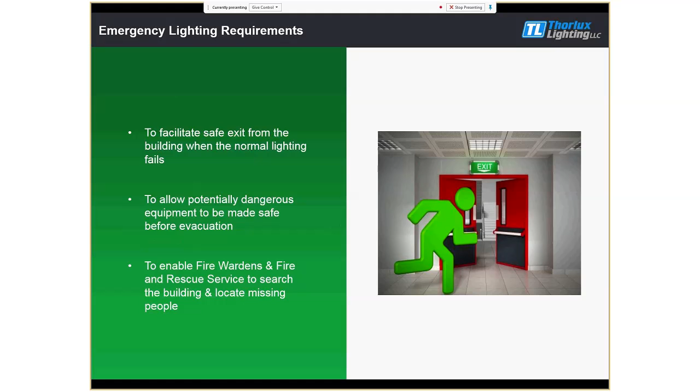So, emergency lighting, what is the point of emergency lighting? Well, of course, it's to facilitate safe exit, so people can get out of the building quickly and safely in the event of emergency or a mains power failure, to allow potentially dangerous equipment, particularly in industrial environments, to be made safe before those people evacuate. And in many cases as well, it's to allow fire wardens and the fire teams to search the building and check for any missing people. So emergency lighting really does have quite an important role. The UAE Code of Practice is quite clear.

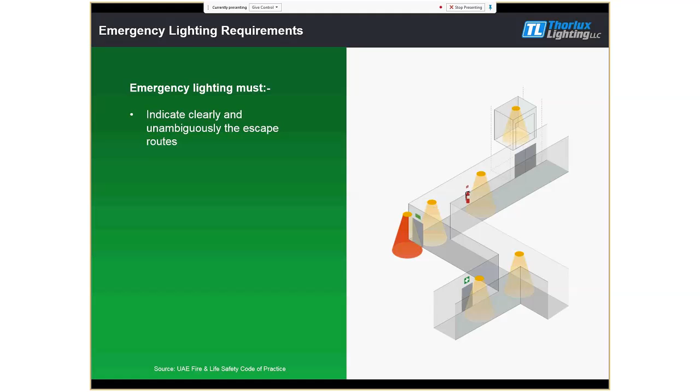It says that you must indicate clearly and unambiguously the escape routes, provide illumination along such routes to allow safe movement towards and through exits, to ensure that fire alarm call points and firefighting equipment are sufficiently illuminated so people can readily locate them as they exit the building, and permit operations concerned with safety measures inside the building.

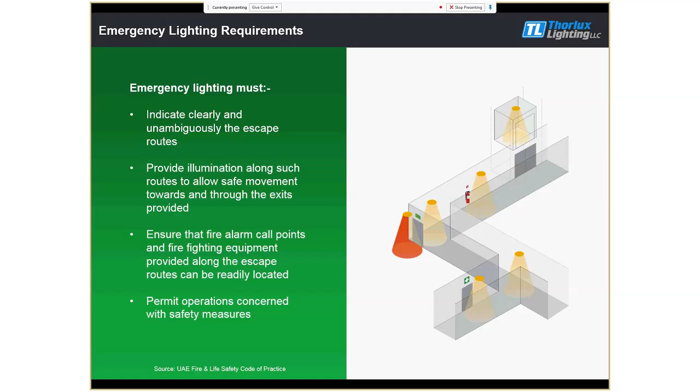So the UAE code is quite clear there in terms of what you've got to achieve, but how do you actually achieve that? Well, if we start to break emergency lighting down, then essentially we have two forms of emergency lighting. We have standby lighting, we have escape lighting. Now, standby lighting isn't covered in the UAE code, but standby lighting is, of course, where you have a UPS supply or a generator supply that's supplying 100% of the power to the luminaires, so all of the activities can carry on if mains fails to the building.

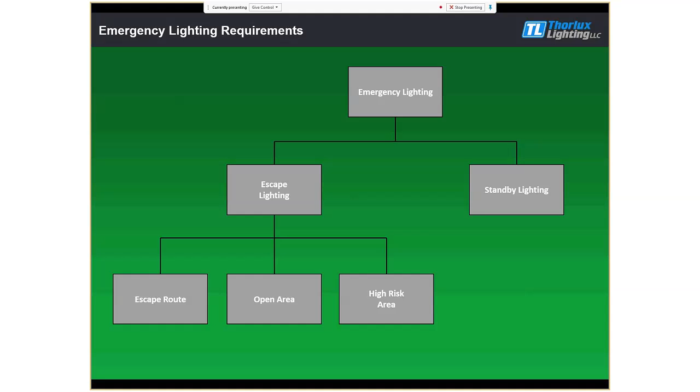When we then start to look at escape lighting, then we can start to break it down a little bit further. So we've got escape route, open areas, and high-risk areas. And this is where we start to put a little bit more meat on the bones in terms of what the UAE code requires. So along escape routes and corridors, anywhere where people are going to be joining the flow to get out of a building, we've got to achieve 10.8 lux average and 1.1 lux minimum. So, of course, this is quite a lot higher than what we're used to in the UK. And, of course, a lot of this is driven through the American standards.

There's also a uniformity requirement, 40:1, so maximum to minimum. So we must make sure that the contrast between the high and the low spots isn't too great, so we have visual continuity as people escape through the area. For open area lighting, this is usually deemed an area that is over 60 square meters or has an associated risk with it. And again, the light levels are the same, 10.8 lux average and 1.1 lux minimum, and the same uniformity requirement. And it's usually reasonable to exclude a half a metre border around the outside, just like we would with the UK standards as well.

As we go into high-risk areas, this really does require some extra thought and attention. In most cases, particularly in industrial areas, and of course out in the UAE there is a lot of industry, a lot of very dangerous processes, these need to be made safe before people evacuate the area. And then, as people work their way through these spaces, it's got to be safe for them to do so. So the illumination levels step up a level. We're now looking at 10.8 lux minimum rather than an average. So again, we're starting to see quite high light levels. So in most cases, you will probably need to look at a central battery system of some sort to be able to provide those kind of light levels. I'll mention that in a second.

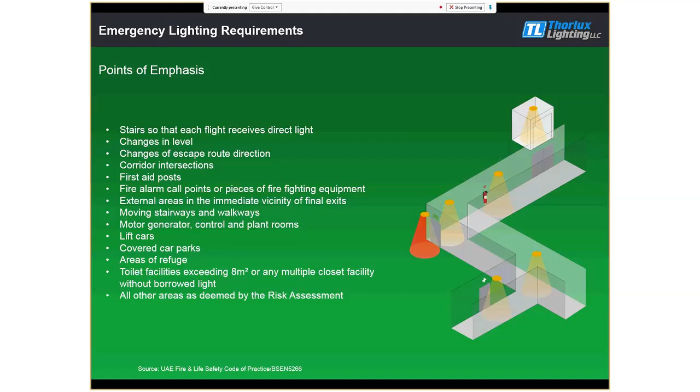So as we're planning our lighting designs, we must make sure that all of these areas are catered for in the design process. The UAE code, again, is quite clear that the emergency lighting must be provided for 3 hours. Again, nothing new, very similar to what we are familiar with. However, what is different is that after 1.5 hours, you have to hit at least 60% of your designed light levels. So if you're designing to 10.8 lux average, then you can go down to 6.5, and obviously 1.1 lux minimum would become 0.65 lux.

I can't imagine anyone actually going around with their light meter after 1.5 hours and measuring these light levels. But nonetheless, that's in the code there. I think it's not really needed these days, because most manufacturers' lumen outputs typically take into account battery degradation, lamp degradation, etc. So the lumen outputs that you designed with are at the end of a 3-hour duration, at the end of life of the battery, etc. So you should never really get into that situation anyway. But just be aware of it, because you might come across it.

Hotel rooms and suites also need to be covered. So again, in the UK, we don't need to worry about this. But out there, it's quite clear that you need emergency lighting in those areas. And it also pays special attention to buildings where many people may be in attendance. So I think this is an indicator that extra thought needs to be given to these sorts of places where lots of people can congregate. So in terms of emergency lighting design, it needs to be very robust and rigorous. Again, we're all very familiar with this.

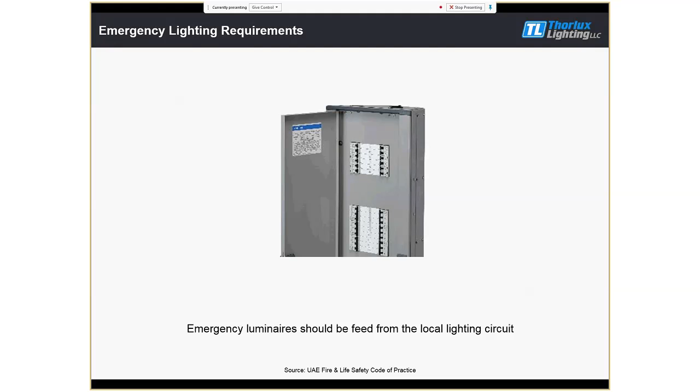Emergency lighting should be fed from the local lighting circuit. Of course, it goes without saying. And again, the UAE code is very clear on that. And this is where we start to get a little bit strange. So when it comes down to testing of emergency luminaires, it makes these following statements. Emergency luminaires shall be automatically monitored and tested through a dedicated control system. So where we're putting emergency lighting into buildings, it must be auto-test.

It must be self-test. But talking to a lot of people out there, if you've got a fairly small building, then they're clearly not going to invest in a self-test system, and it doesn't happen in quite a lot of cases. But nonetheless, it's there, so just be aware of that. I think what it's trying to drive is that certainly in large buildings, this is desirable. And where you've got an automatic test system, it needs to be interfaced with the BMS. Now again, it says it should be interfaced, but it doesn't say what should be interfaced, how much should be interfaced, or what the interface protocol should be. It just says it should be interfaced. So that's a little bit open to interpretation.

But just going back a stage, talking to some of the consultancy practices out there, every single emergency lighting design has to be approved by civil defence. So in a lot of cases, I believe what happens is that if you've got a small building, and it doesn't make sense to put a self-test facility in, then you can have that dialogue with civil defence, and you can say, look, my building's only got 3 rooms, I've only got 10 emergency lights, I'm not going to be putting a self-test system in, and civil defence will make a judgment and instruct otherwise.

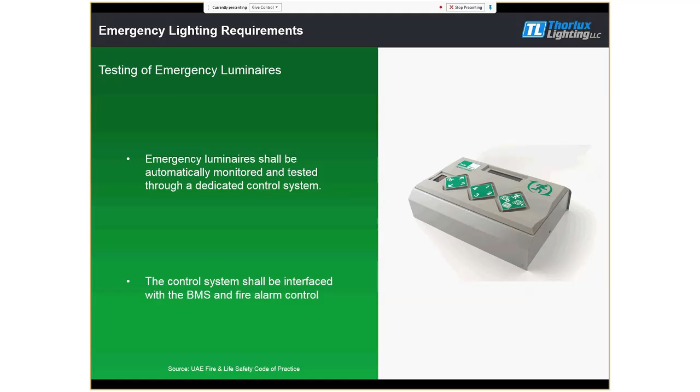And I think probably this is why they don't put too much detail in here, because civil defence have to approve every project, so you will naturally get into dialogue with them, and they will steer you in terms of what they expect. So clearly, if you've got a very big building, they're looking for a pretty robust and automated system, particularly in terms of communication. Whereas the smaller you go, they may not be so bothered about that. But just be aware of that in there.

Exit signage, of course, is needed to direct people out of the buildings. Not really anything different to what we're familiar with. It does say to ensure that escape routes are apparent from any location in the building. So if it's not immediately obvious where you exit, then you need a series of exit signs to be able to direct you out. They should be conspicuous, and we must consider smoke accumulation as well.

So the mounting height of exit signs does come under scrutiny. Mounting them too high can cause some problems, so we do need to give that consideration. Where we are using exit signs, it's quite happy to use either externally lit or internally lit. Just a reminder, there is a limit on viewing distances.

So if you're externally lighting the sign, then you can only realistically have a viewing distance of up to 15 meters if you've got a typical 150 millimeter high sign. Internally lit, of course, you go up to 200 times the sign height, so you can double that up to 30 meters. So just give that some consideration as you're working through the scheme. But again, not really different to the UK.

Clear and unambiguous. I love this picture. I've got a few like this, but I think that's the best one. Which way do you go? So, of course, it goes without saying, with any exit signage, it really must be very clear in terms of which way you exit out of the building.

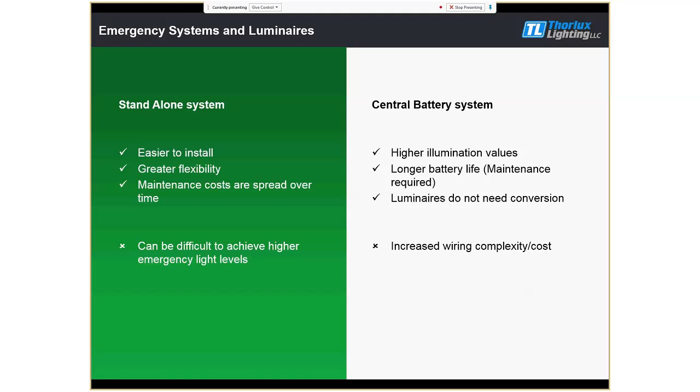In a lot of cases, luminaires don't need conversion, so you can just hook those straight up. But increased complexity of wiring and cost, and there's a particular facility of the UAE code, which I'll mention in a second as to why that's prominent. The central battery cabinet needs daily inspection to make sure that it's in a ready state to provide emergency lighting. If one unit fails in a room with a standalone system, that's probably not going to be a big problem, but if your whole cabinet goes down, then you're in a bit of trouble. So it needs daily inspection.

And you can also have a problem with capacity. If you haven't got headroom in the system, then as the building changes and you want to maybe put more emergency luminaires into the building, you might have a problem in doing that. Whereas with a standalone system, of course, you don't have that. So there are benefits and pitfalls to each, but the UAE code is quite happy to accept both systems. It doesn't particularly steer you down one route.

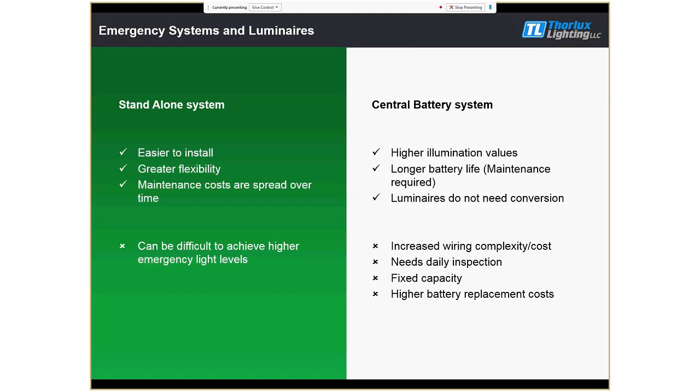Oh, I missed one there. Higher battery replacement costs, yeah. So of course, once those batteries do come to the end of life, they're quite expensive, and it all comes in one hit to the end user, which may or may not be an issue.

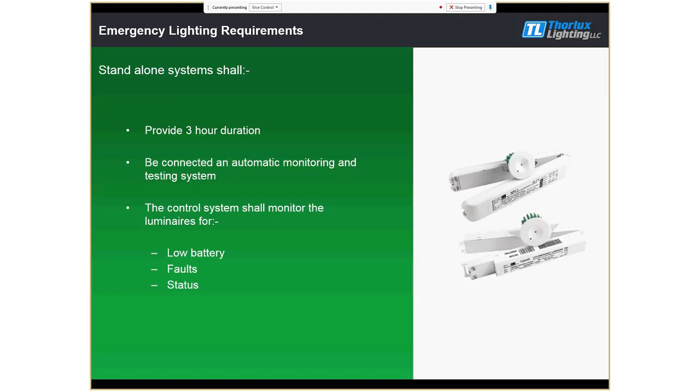So when we start talking about standalone systems, as I've said, they must provide 3-hour duration, they must be automatically monitored, and it says that the monitoring shall be at least for low battery, faults and status. That's all it says. So could be a little bit more detail there, couldn't it? But most systems will usually provide that as a basic.

Central battery systems again provide 3-hour duration. Again, they must be connected to an automatic monitoring and testing system. But it's this that can add to the cost. So it says that a cross-zoning arrangement must be used in the building.

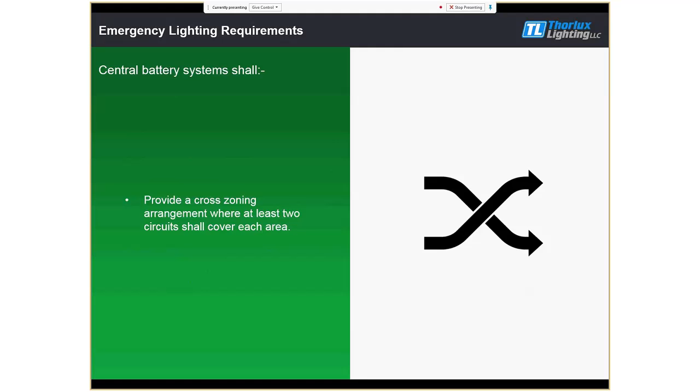So any area must be fed from at least 2 emergency luminaires and from 2 different circuits. So if one circuit is lost, you still have emergency provision in the building. So this is where the extra cost can arise in providing this cross-zoning arrangement, particularly when you're looking at armoured cabling from the central battery, and that's where a lot of cost can come into it.

Product suitability, aesthetics I think really come into play with this. It's amazing how many of those fittings are used out there. So you've got these wonderful buildings, you've got marble floors and marble pillars, and the architecture is fantastic. You look up at the ceiling and they're just littered with those things. And it's just such a crying shame, it really is.

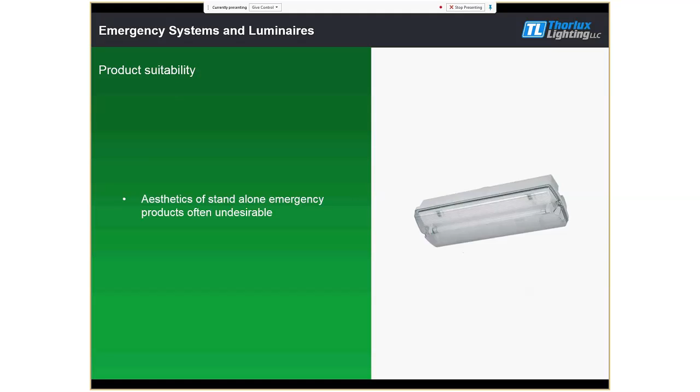So I think we need to think a bit more about product aesthetics, and I think we are moving to a time now where LED technology is becoming quite discreet. So LED technology is allowing us to produce small light fittings, more powerful light fittings, and of course has the long life and lower maintenance benefits to go with it. So we can use lenses to optimize the control. So particularly where we're looking at corridor applications, we can distribute the light down the corridor to use less luminaires.

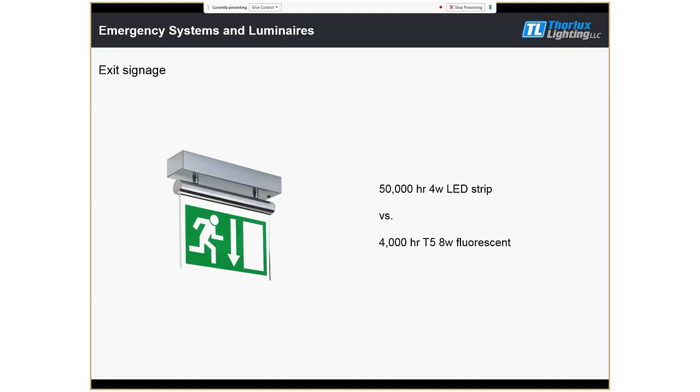LED technology, again, when it comes to exit signage, I think this is the worst lamp ever invented, the 8-watt T5 lamp. In a maintained exit sign, you're looking at 4,000 hours, so you're going to have to change that lamp twice a year in a maintained fixture. Of course, with LED technology, it's not so much of a concern, and I think we're all naturally migrating in that direction anyway.

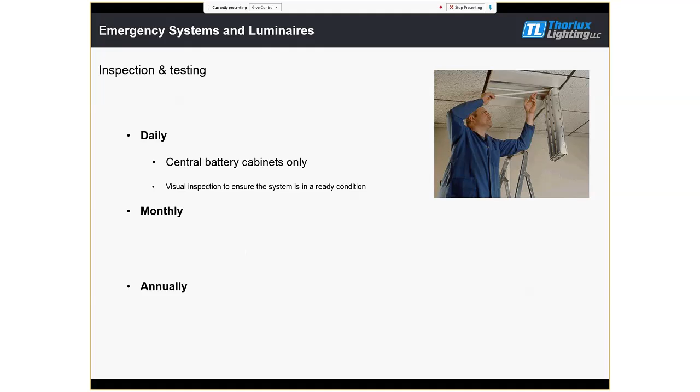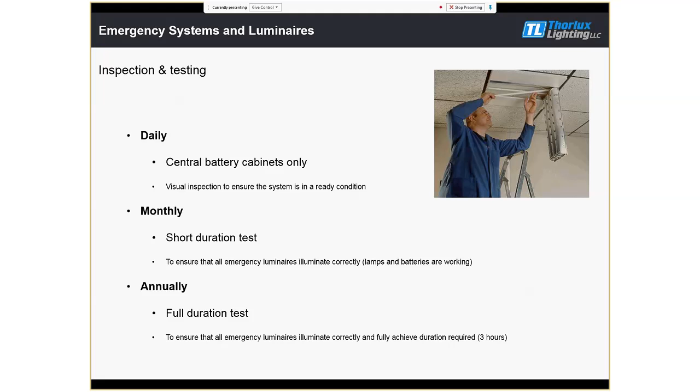So in terms of inspection and testing, as I've already mentioned, with central battery systems we have to do a daily visual inspection to make sure that it's in a ready state. Of course, if you've got an automatic testing and reporting system, then you don't need to do that. Monthly tests, we need to do a short duration test. So every month we need to energize the emergency luminaires and make sure that they strike correctly. And then, of course, every year we need to do the full 3-hour annual duration test as well. So again, nothing different there to what we're familiar with here in the UK. And of course, this is where it really does make sense for automatic testing systems. I can see why they're driving in that direction.

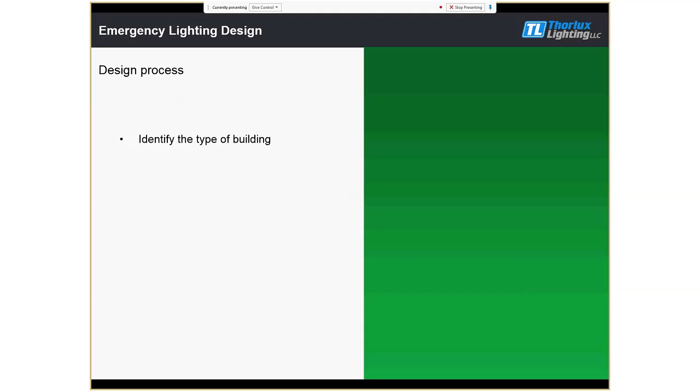So let's just take a very quick look at emergency lighting design. So the design process, I won't dwell on this too much, but some of the things that we need to consider: we need to identify the building type, we need to understand what's happening in that building, we need to understand what the risks are in that building, just like we would with any project when we undertake emergency lighting. We need to identify the exits, the final exits and the safe areas. We need to identify where the escape routes are.

We need to also identify the spaces that are greater than 60 square meters, identify the hazards, identify the points of emphasis, and then we need to start thinking about what kind of emergency products, how those products are going to fit into the space, and the aesthetics of those luminaires. Yes, in the plant room, a lunchbox type fitting is absolutely fine, but in some of the other areas, maybe a more decorative product is suitable.

We need to position the luminaires at the points of emphasis, so all of those areas that I covered earlier on, and then we need to add luminaires in between to achieve the emergency light levels that are required. We need to check glare and uniformity, and I think that this is quite important.

I have a bit of a bee in my bonnet at the moment about glare altogether because I don't think anyone checks glare anymore. In fact, is there anyone in the room tonight that's done a glare calculation recently? Yes. Well done, sir. I'll shake your hand a bit later on. Not an emergency. Not an emergency, no.

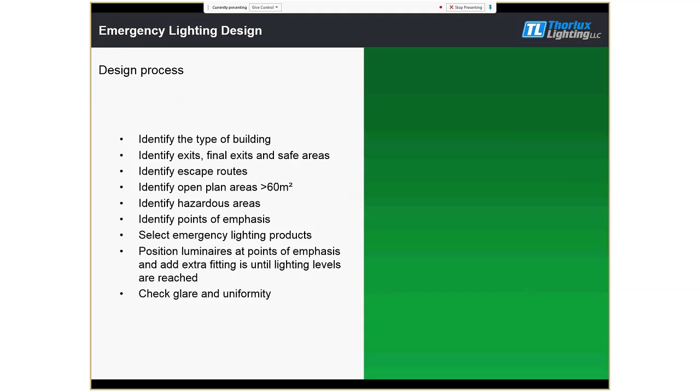But glare, I think, largely is something that we're forgetting completely. And it is important, not just for standard lighting, but it is important for emergency lighting as well, particularly with some of these LED products and high output products. Then we can start to talk about quite high intensities from the luminaires. Now, I'll mention a bit more about that in a second.

I think there's some other design considerations as well. The height and position of the calculation plane. Again, we might not be designing to floor level. We're moving to a time now where we need to start thinking about, well, actually, is it appropriate more to consider the light levels in a vertical surface, for example, or is it more appropriate, certainly in a high-risk environment, to think about the emergency light levels off the ground?

Reflectances of the room. The UAE code, and this is a bit ambiguous, the UAE code doesn't make any reference to reflectances. Now, of course, in EN 1838, it says that we have to assume 0 reflectances in the UK. So we have to take worst case. So if someone comes along and paints the wall black, or if there's a lot of smoke build up in the environment, then of course you lose reflectances quite quickly.

Talking to a lot of people out in the UAE, some people use 0 reflectances, and some people, to try and get the scheme through, carry on using reflectances in their emergency calculation. And I couldn't really get an understanding from civil defence either where they sit on this. So unfortunately, I can't really give you much of a steer on that.

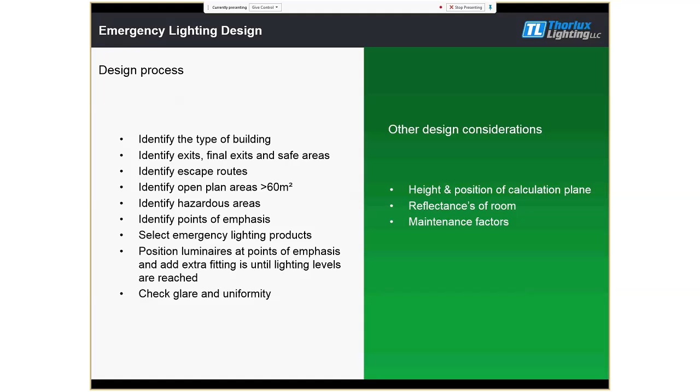So just coming back to this glare issue. So as I said, the UAE code does reference EN 1838. And there is a requirement there to meet certain glare limits. So for a ceiling height there of 2.5 to 3 meters, you can see that in open areas, there's a limit of 900 candelas from the luminaire, or 1800 candelas in a high-risk area. So again, coming back to some of these high-intensity LED products, we do need to check this, we do need to cross-reference this, just make sure that some of these products are suitable.

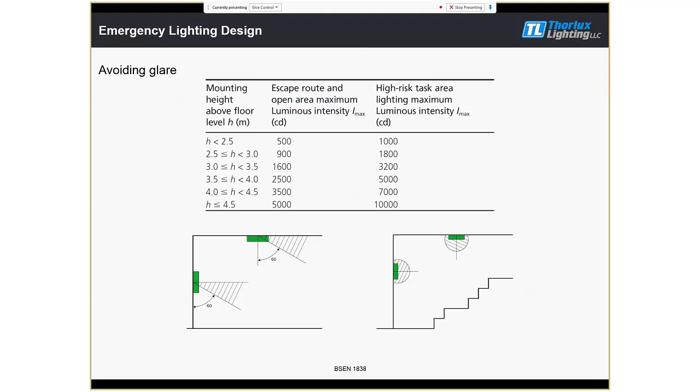And what we can see is that depending on whether you've got a flat ground, or whether you've got some stairs, then the angles that this applies to the product changes. So these intensities only apply up to 60 degrees if you've got a flat surface, but if you're coming down the stairs, then it applies through 180 degrees of the luminaire. So do give that some consideration as well.

The other thing is positioning of emergency luminaires too, and I've come across a couple of jobs now where they use these twin spot fittings and put them right over the door. And when you switch them on, you can't see the door. So we've got to think about where we locate these. And again, EN 1838 gives us guidance: 2 meters horizontally, 3.5 meters vertically outside that zone, so people can actually see the exit door. So we just need to give some consideration to that as well.

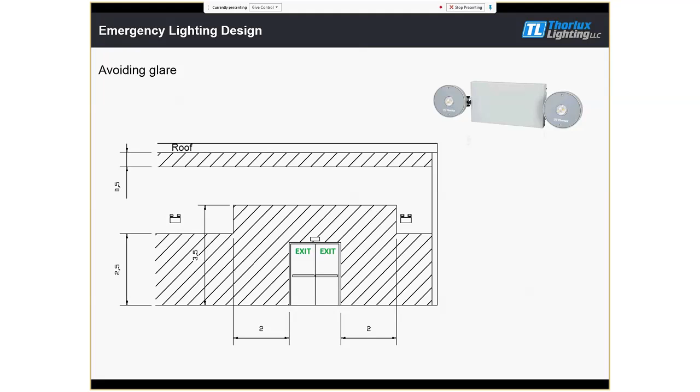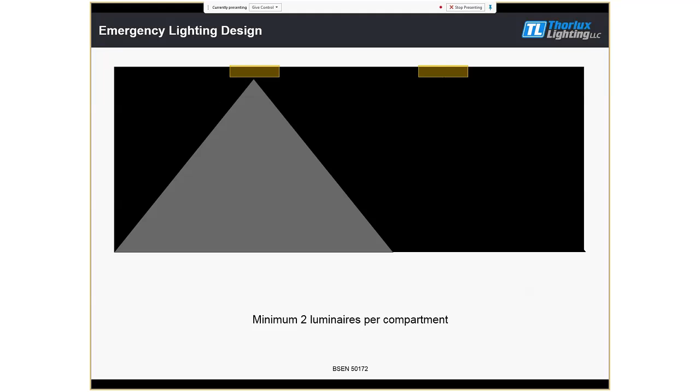Of course, twin spot's quite good for illuminating large open plan areas, which again we get quite a lot of in the UAE. Two luminaires per compartment, as I've already said. So if one circuit fails, if it's a central battery system, or if one luminaire fails as a standalone system, then there's always a backup there, not plunging the whole area into darkness.

And let's finally just take a look at some approved products. So this is quite an important process and quite an important part within the UAE, because all life safety, fire safety, and emergency services shall be listed, approved, and registered by the Civil Defence Ministry. So they will not allow any emergency lighting product that hasn't been approved by them to be used in a lighting scheme. And it's quite a rigorous process.

So out of the 7 emirates that are out there, they all have their own different requirements. They all have their own civil defence authorities, if you like. And you, or a lighting manufacturer, will need to seek approval from each of those civil defence authorities. So just because you get your product approved in Dubai, under Dubai civil defence, doesn't mean that you can use it in Abu Dhabi. So it's quite a process to go through.